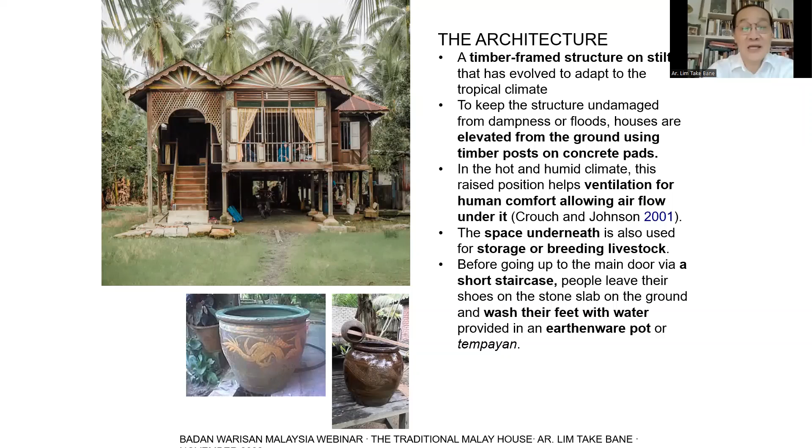Here you'll see the material as it was originally used. It's timber. The planks that form the side of the building are made of hard tropical timbers like balau. Then the roof, you'll notice, is pitched to keep the rains off, and it has a sort of atap covering. Atap is actually a woven leaf of nipa palms, and they are lashed together and tied almost like thatch, as in the European setting, say in England, where you have an English thatch cottage. This is our local equivalent of nipa palms.

Now, the environment, as I said, this is basically the compound in which these houses are set. The basic form of a Malay house is that there's a rumah ibu, which is the main house, and adjacent to it is a rumah dapur, which is where the kitchen is.

Now, if you can see from this picture, the house is placed in the middle amidst a clump of trees, usually coconut trees. Then they have a simple garden in front, which allows for a nice, warm, welcoming feel, with flowering bushes and maybe even some edibles, like chilies and things like that. A very attractive, warm, welcoming gesture to a guest or to the family members.

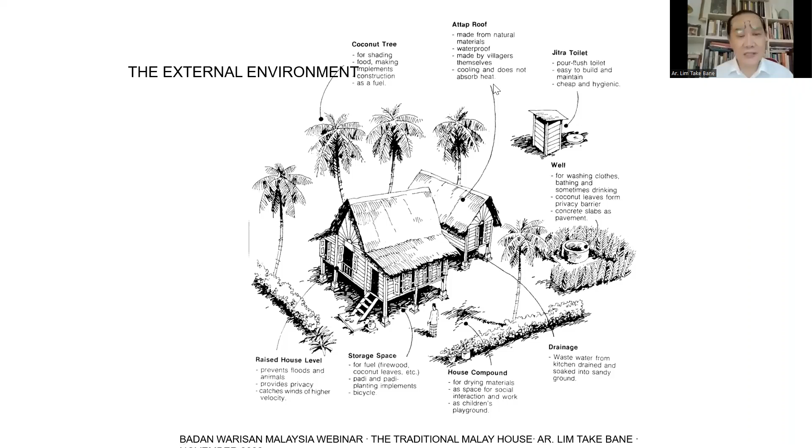Next. So these are pictures, just a simple illustration. Here's a simple example: a grass entrance, some stone steps to help you along, and the atap. On the left, it shows the atap untrimmed. On the other side is the atap trimmed, and the building, as you can see, is basically a boxes-like building with a pitched rooftop, large overhangs, and lower roofs.

Next. Now, across the building, this is a cross section showing how cleverly they have adapted for the local climate. This structure is basically a highly sustainable building, in my opinion, because it uses passive solar control to mediate between the hot, wet, humid weather outside and the interior, where it's much, much cooler. This is achieved mainly by having a high porosity or permeability, meaning the walls that constitute the sides of the building are punctuated and perforated to allow air to go through. It could have large windows, giving cross ventilation across the building.

Then below the ground, there's also another bit of air that comes right through and lifts up against the floorboards. I've stayed in some of these houses before. At night it's very cool because the boards are not tongue and groove; they're just butt jointed and there are gaps there. So the air comes all around you, from the sides and from the bottom up, and right at ceiling level, higher up, there's air breezing right through. So it's very, very open.

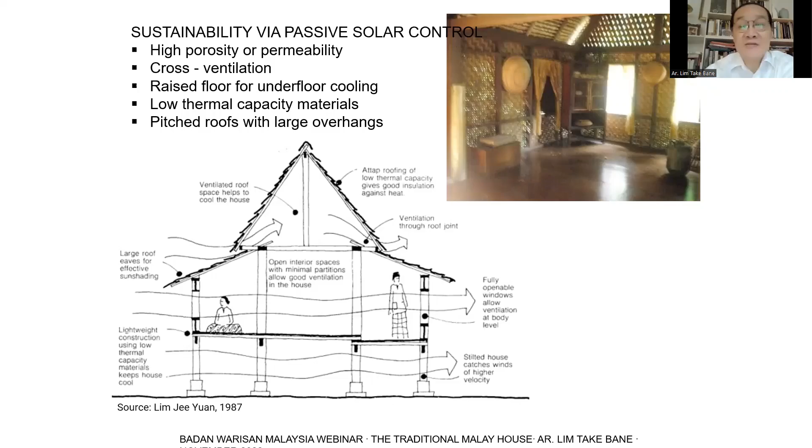Now, this is basically a picture I put together to show you the contrast between the language used for the architecture. Here is a design language of the tropics, which is an architecture of line, edge and shade, contrasting against the Palladian European one of form, volume, and shadow. The European buildings are solid and massive, the fenestrations are smaller, the openings, windows and doors are smaller. In the tropics, what we want to achieve is a very thin line and edge, almost like a screen, a perforated screen, and the air breezes through very comfortably. It becomes very light, almost like a bird cage — you can feel the air being blown through. So the quality of lighting inside the building is also different because it's layered and the shadows are delicious. Next.

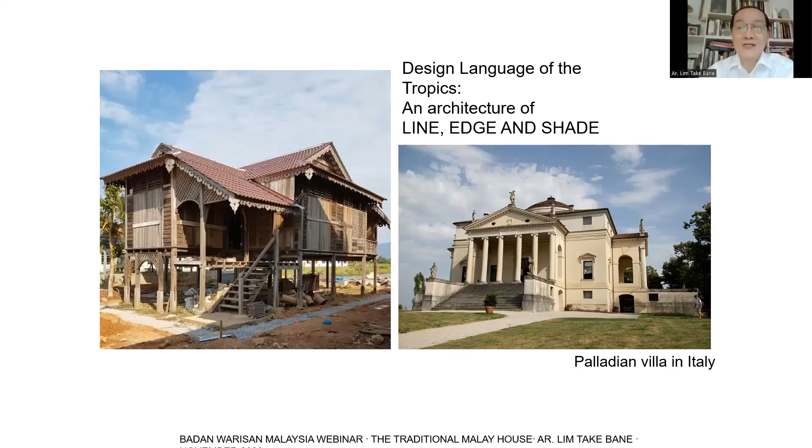Now, let me just take you through how you would go through the interior spaces of a traditional Malay house. This is a typical Malay house, a modest house. The plan is laid out in two main areas: there's a male section and a female section. The male section is the front of the house, obviously.

So you arrive at the main entrance, which is at the porch, or in Malay it's described as anjung. This area is a semi-public, semi-private space because you have not entered the house yet. There's a roof that extends down over your head, and you get this sense of being half in and half outside the house, where you could talk to somebody casually walking past without actually entering the house.

The equivalent sort of space in other Asian contexts would be the ma, the intermediate space in a Japanese house, very similar. From there, you open to the front door and arrive at a corridor-like space, a front covered veranda. In Malay, it's described as a serambi.

This serambi is a serambi gantung because it's hanging off, not at the same level as the main body of the house. From there, you lead on to the main portion of the house, called the rumah ibu. We'll describe it later. Then the main portion of the house is connected to the rear extension, a separate wing or arm, connected by a corridor or passage called the selang.

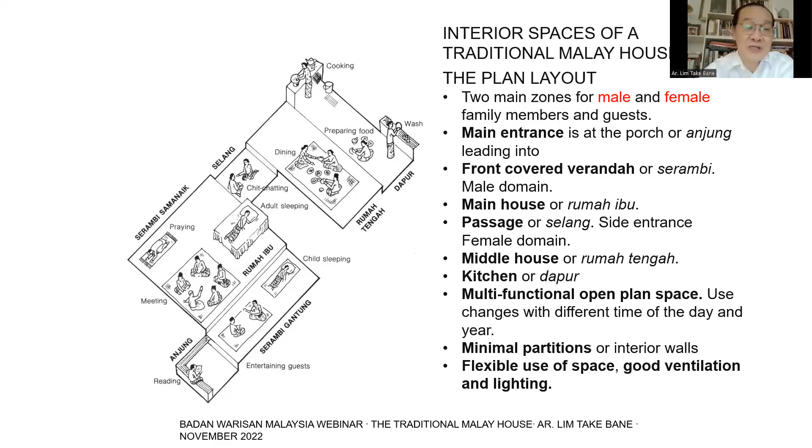Here's an enlargement again. You can see the anjung. The serambi gantung, as we said, is the formal reception area for male guests. They will sit there and have a discussion, and sometimes a child may sleep in that area. Then the levels are adjusted to delineate the importance of the space.

The rumah ibu is normally elevated about 7 inches off the serambi gantung, just a slightly raised plane, wooden floors again, and you have a variety of activities there. One corner of it may have a little screened-off area where the adult has a bed which he sleeps on.

A corner to the back, there's another covered veranda, which is samanaik, the same level as the rumah ibu. Then you have a meeting area where you could do a variety of things. You could sleep there, study there, have a meeting, have a jamuan, a big feast, a kenduri there, or do some housekeeping work. If you're doing weavings or ironing your clothes, all that could happen in this rumah ibu.

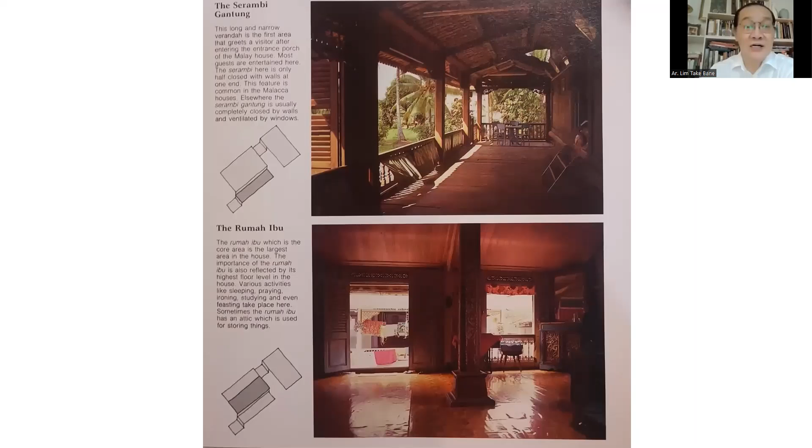Here is a blow-up of the rear portion of the house. You go across the passageway, called a selang. It also has a roof over it, and the women in the household would sit there to chat or do some general work around there.

The kitchen right at the back is where the cooking and washing up is done. At the top right-hand corner there's a wash-up platform of slatted timbers, like a drying rack. Most of the activities happen on the floor, with hardly any furniture which elevates it higher.

As said earlier, there are mainly three zones. One is the formal reception area, the Anjung and Serambi, considered the male portion of the house. Then the private living, the Rumah Ibu, where family members and certain guests may be invited in. And then right at the back is the female portion, where you have the cooking and the ladies gather, with a separate entrance near the selang.

There are flights of steps there as well, and it's also a covered area where you can have conversations and chit chat. This change in level is based on an open sequence, experienced through change in volume of the space, or by levels, rather than by partitions which could delineate it. In those days, people were less formal. They could hang a piece of cloth, like a curtain, to delineate a line.

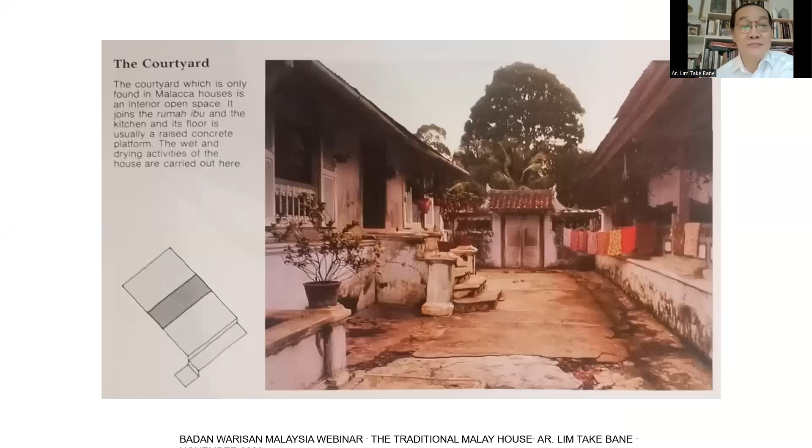These houses are flexible - they could be moved around by basically lifting them off and carrying them away. You can see the bucolic setting, very open, with no visual boundary. You can see as far as the eye can see to the mountains in the distance and the end of the paddy field - it's very open.

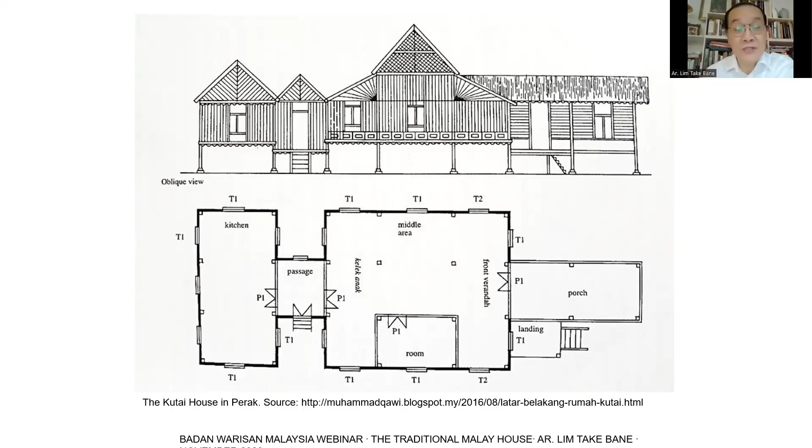You can see the house is very perforated - the air blows right through. And consequently, there's also this element of reduced privacy. It's very easy for your voice to travel from your bedroom to your kitchen, so as a consequence, people were more soft-spoken in those days - you didn't raise your voice, you spoke softly and gently.

Here are other examples of houses in the region, different styles, different variations on the theme, but you can see more or less the same language being used - a wooden house of one level on stilts, sitting on concrete bases. Inside, everything is wooden - the floorboards, the walls. The rooftop is made of either tiles, which came later, or a woven atap.

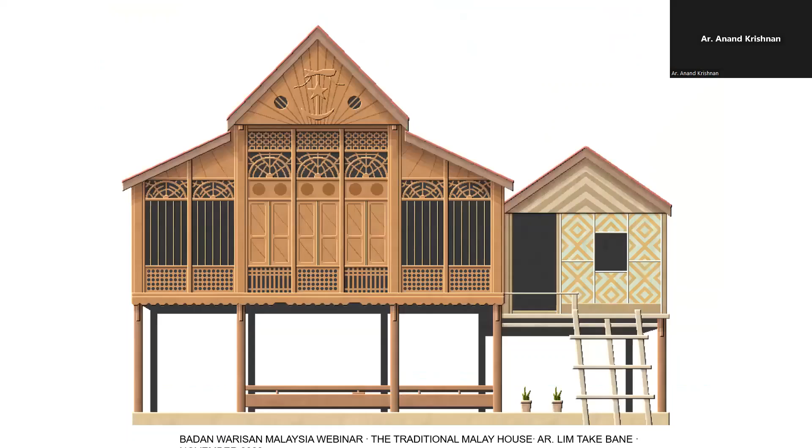Bane, you have another 5 minutes. Okay, I'll run through very quickly then. Here you have pictures of the house. Inside, you see a very airy feeling.

Here's a modern version of the Malay house.

This shows the different main types of roof forms. You have the bumbung panjang, a long roof. You have the bumbung lima.

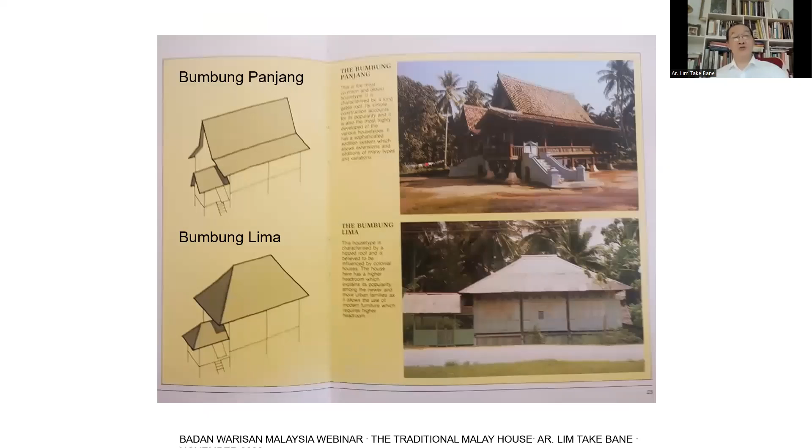Bumbung perak, with Western influences. Then you have bumbung limas, which is more for mosques, the five-sided pyramidal form.

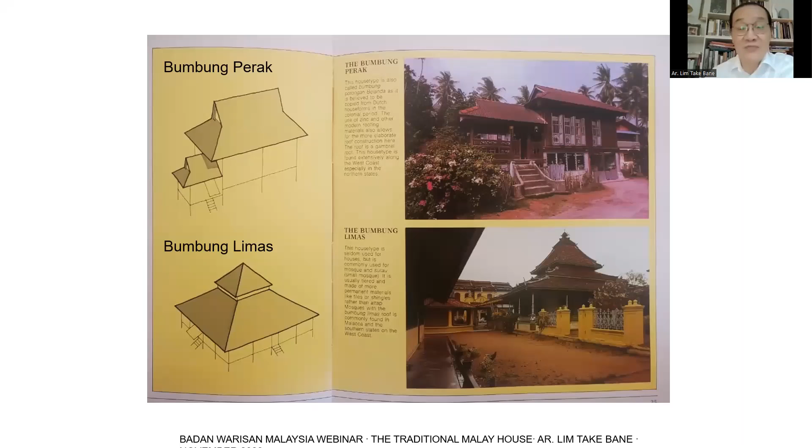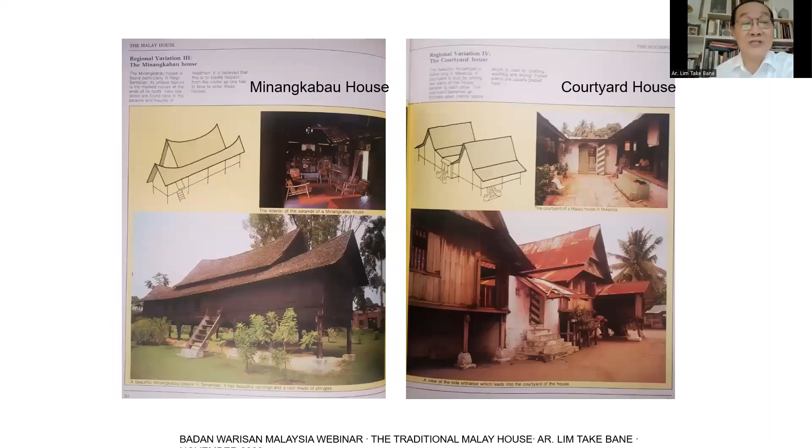Courtyard house, the Minangkabau house, which we touched on earlier. The Minangkabau roof. Now, there's a very interesting ritual of how they locate the house.

They get the village shaman, or bomoh, who will say prayers and use a spirit kemenyan to engage with the unseen world. The mother of the house, the ibu of the house, the woman of the house, measures her outstretched hands as a unit of a depa. Then a string is used as a measurement, and the bomoh ties it to this rod, and they'll say more prayers, and then next time say more prayers.

Then he'll stick it in the ground, and they'll plant it with a pail of water, full of water, and then they say more prayers again. The next morning, they will take off the string and measure it again, whether the string is lengthened or shortened. If it's shortened, then it's no go - that space is not good for putting a house. Same with the water - if the water has spilled over, not so good.

Sorry - if the water has spilled over, it means there's good, there's plenty, then you would use that site. If the string is long, then it's good. So that site where that stake was stuck will become the exact site where the tiang seri, the main king post of the house, is located.

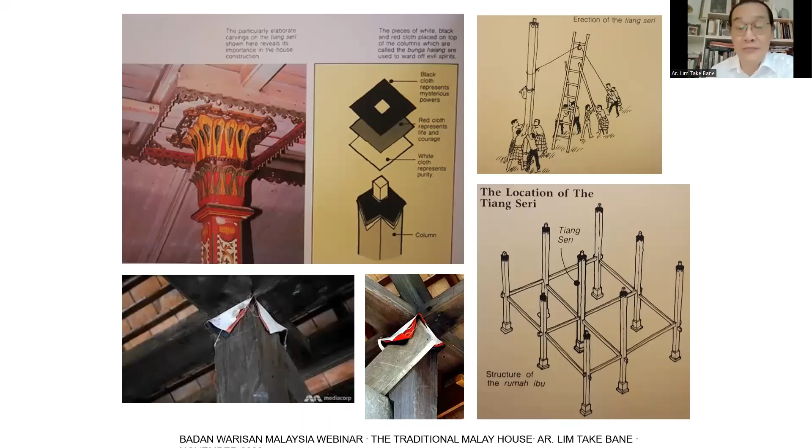Here's a very elaborate tiang seri in the Minangkabau house. There's a flight of stairs, maybe going upstairs to what's called the loteng, which is an attic. If the ceiling is high, there's an attic where young girls, when they reach puberty, sleep upstairs. In this case, the backdrop is a pelamin, a very grand ornate pelamin. These are just additional possibilities where you can enlarge the house infinitely.

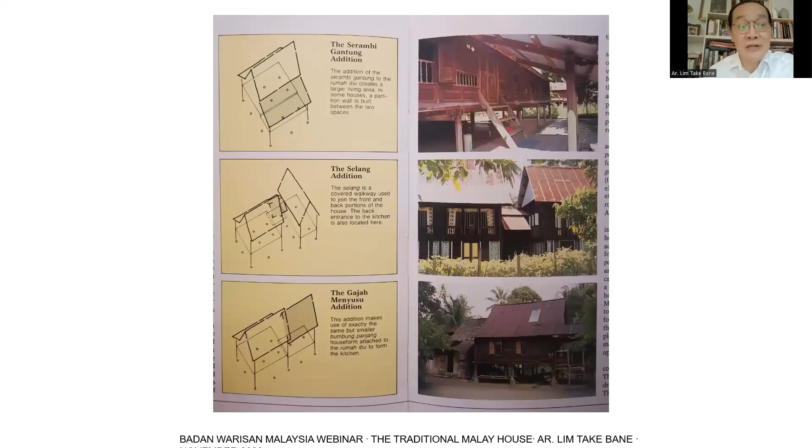Many options. These are examples: the Serambi added on, the Selang added on, and so on, the Gajah Menyusu versions. So these are just versions of it. I'm running out of time.

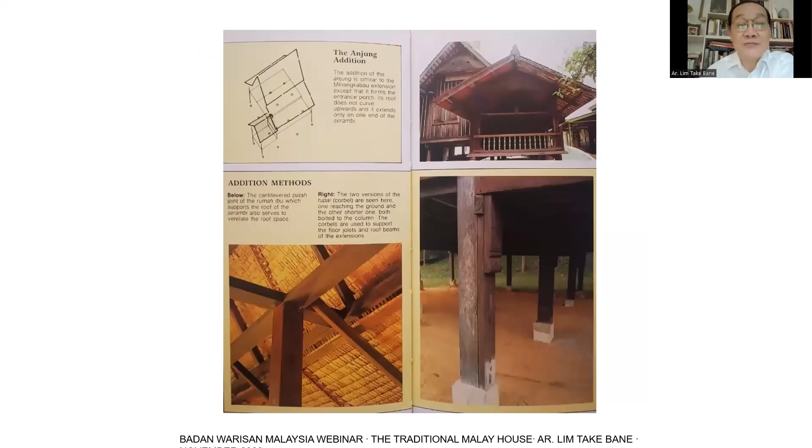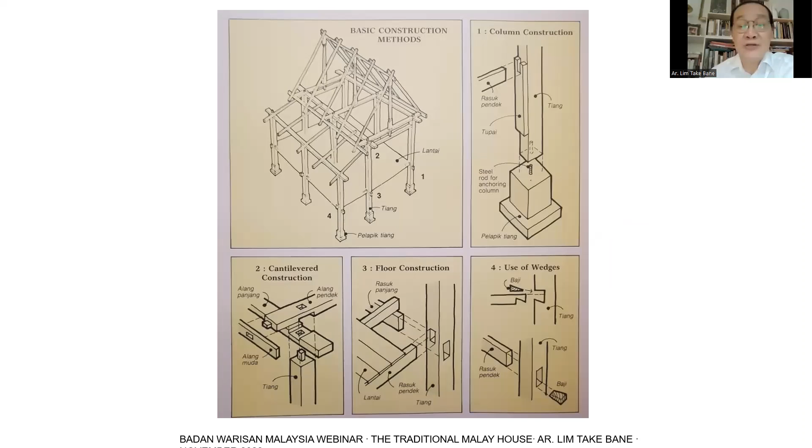The sequence on construction and timber construction - those who are interested, there's lots of material available, books written on it and studies made. Timber construction uses no nails; they use wooden dowels called baji.

And the sequence of erecting the house: the king post goes first. The things are all prefabricated, brought to site and just erected as panels.

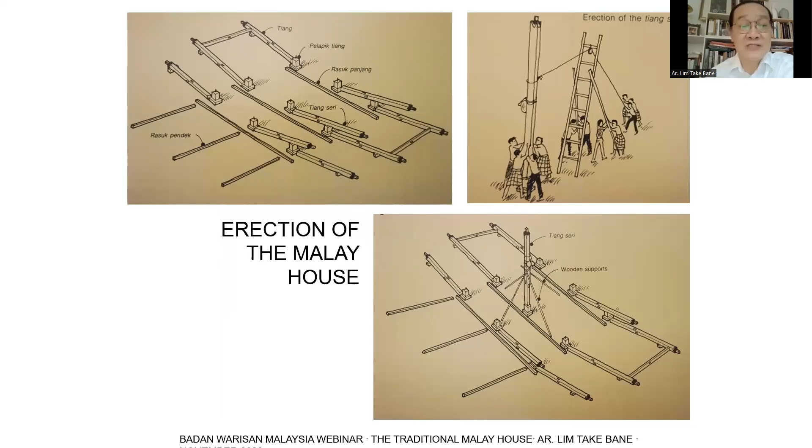Then there's a whole sequence where they reach up to the top. There are intermediate platforms put in temporarily, and then the roof is put on.

Here's a detailed breakdown. There's the tebar layar with the sun motif - that is the gable ends.

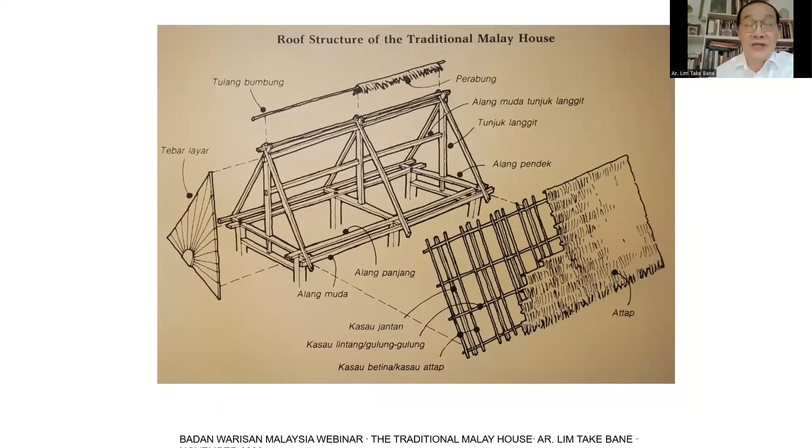The end, the tebar layar or gable ends - sunrise motif, sunburst rather. They are also used as ventilation panels, the openings there.

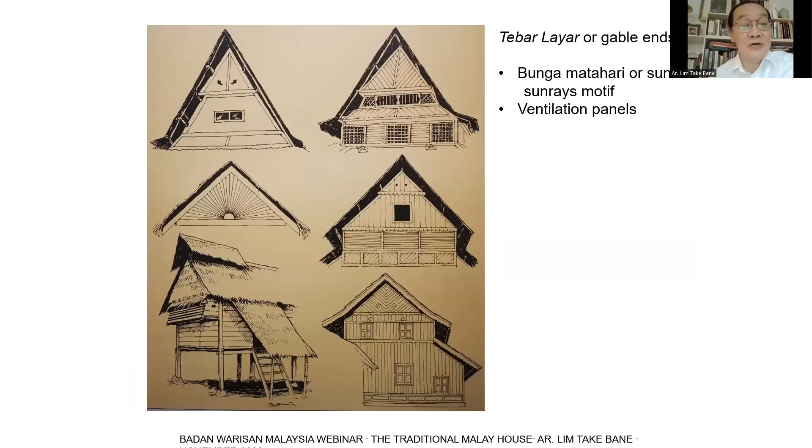In the geomancy of a Malay house, it's not fixed - you can carry the house and shift it somewhere else. It's not like Chinese feng shui where they're so determined you put it at a certain angle in a certain place or specific location.

So the whole kampung gets together in the community spirit of so-called gotong royong. They will lift the house, carry it across to another part of the village. Say you marry into the family - they will carry it and live next to your in-laws, with your in-laws.

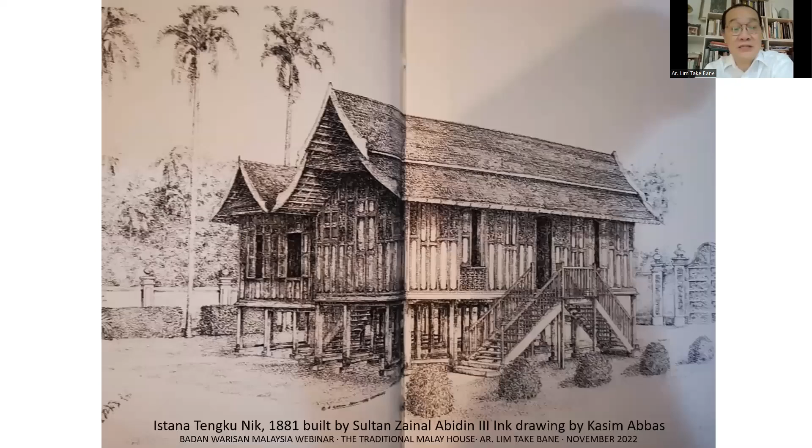This is an illustration of Istana Tengku Nik, built in 1881, an ink painting by Kasim Abbas. This house was relocated to the Terengganu Museum - it's there if you want to visit it.